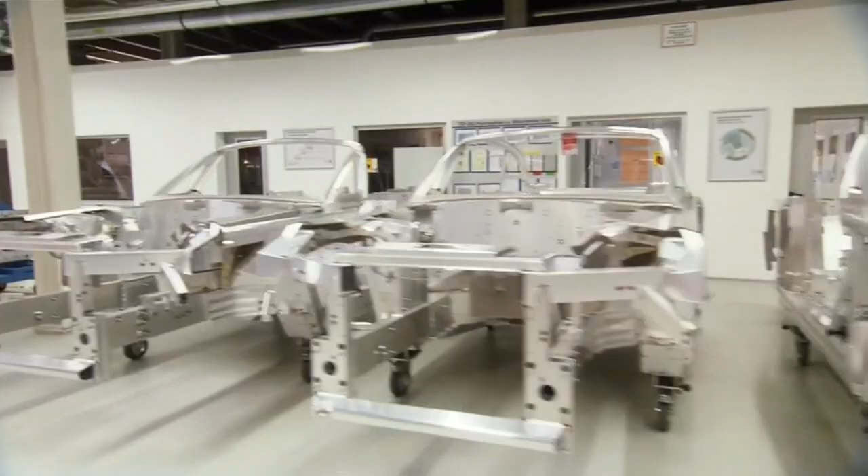You need the right skill and the right feeling.

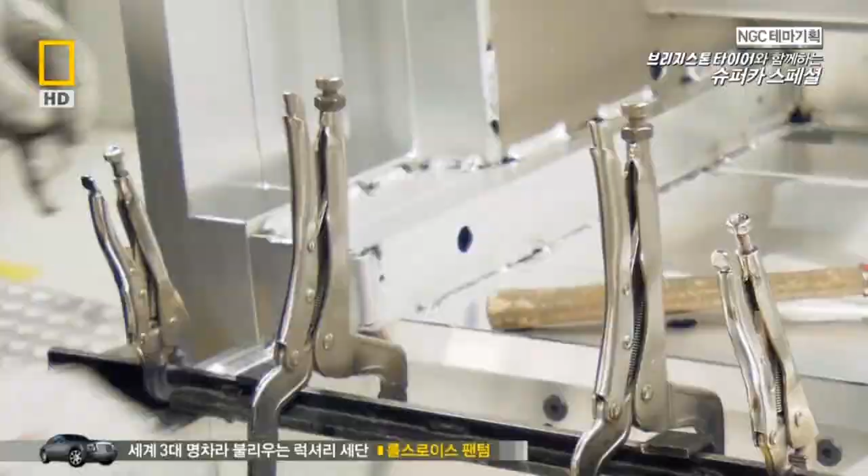It's complex because when you weld parts together, aluminum parts together, you always get distortion. It must be absolutely perfect. So it's important to have people who have feeling for the material.

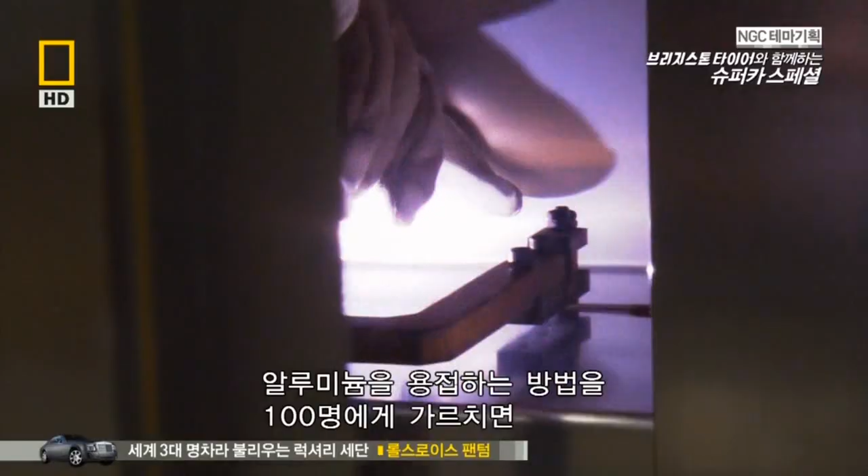For welding aluminium, you need the right skill and the right feeling. If you teach 100 people aluminium welding, 10 out of 100 will be able to manage that.

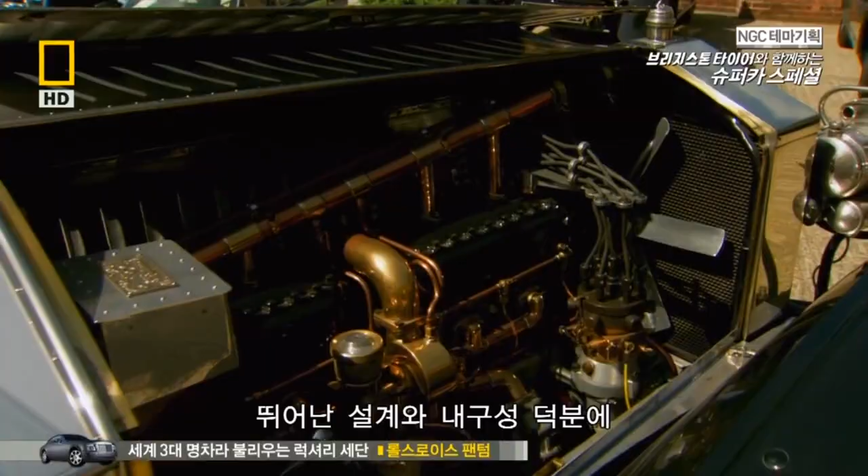The Silver Ghost was a totally outstanding car. It was very well designed and it was very durable, and this enabled it to do what it did. It was a marvellous thing. From 1907 to 1925, it really was the top luxury car in the world.

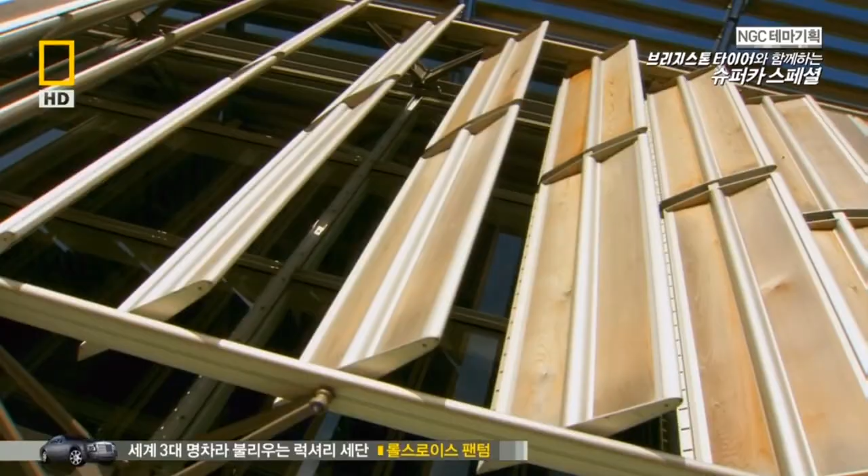I think it's a great destination, both for people who come and work here and also for customers who come to see their cars being built and take delivery of their cars here, or indeed come and order a car here.

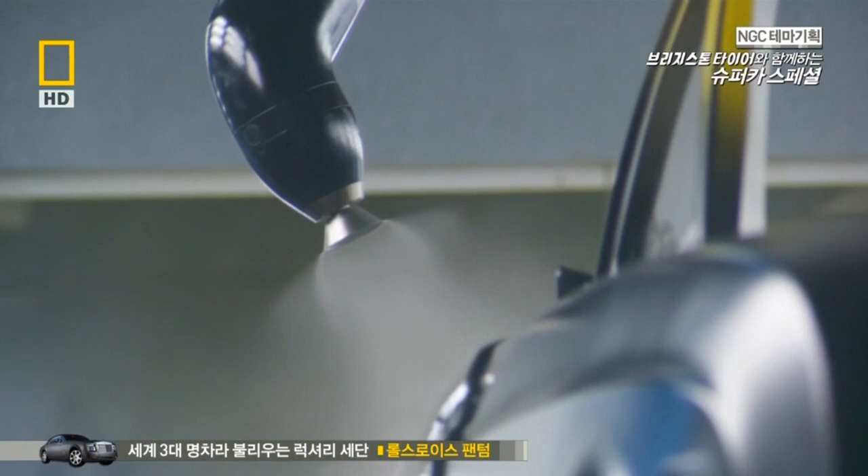The piano finish, it's pretty well close to a mirror in terms of smoothness. You can see your face in the final finish, it's that flat.

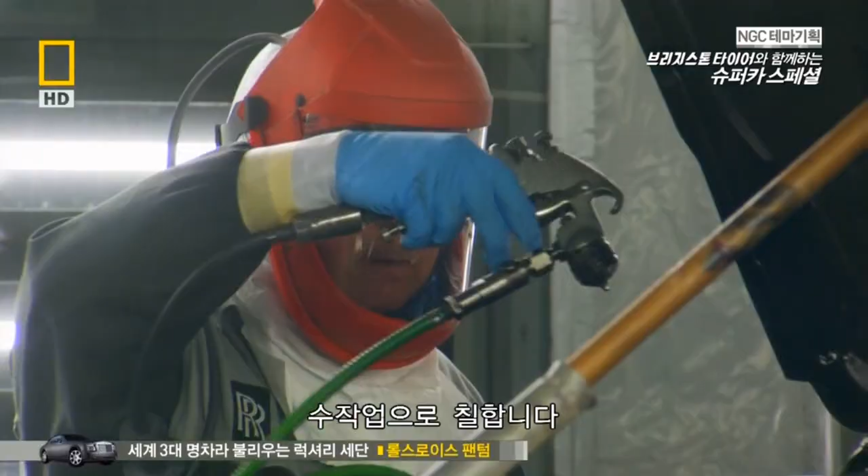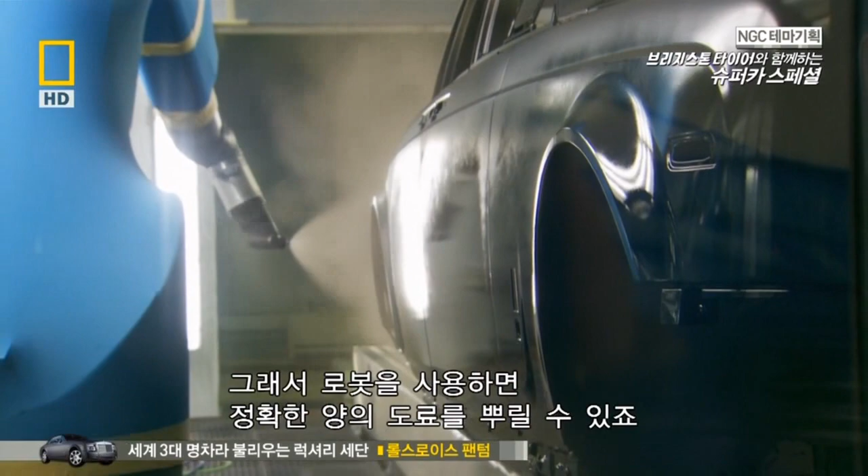Paint color can vary a little bit dependent on thickness. So by using the robots, we can therefore ensure exactly the right amount of paint is laid on the car. You'd have great difficulty achieving it by manual spray.

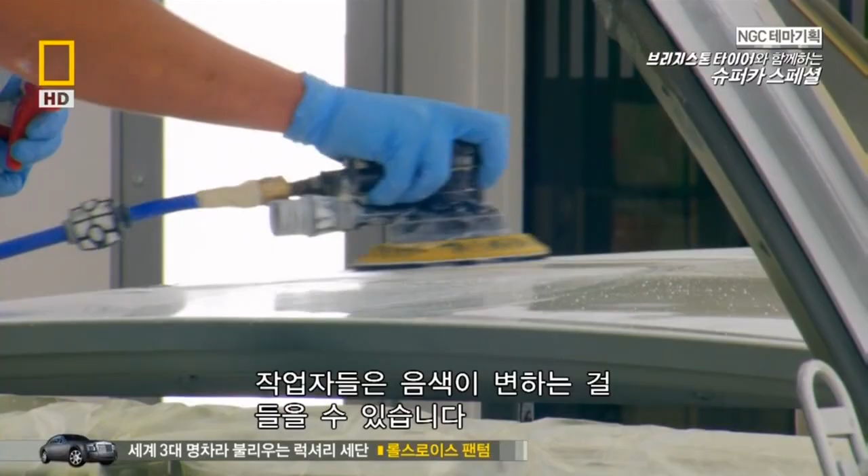As the paint surface has lost its wavy appearance and goes flat, the person working the car can actually hear a tone change. And that indicates to him he's gone to the point where he can stop the process. So it's a very difficult process and requires a lot of concentration and people's skills that you could never do with a robot.

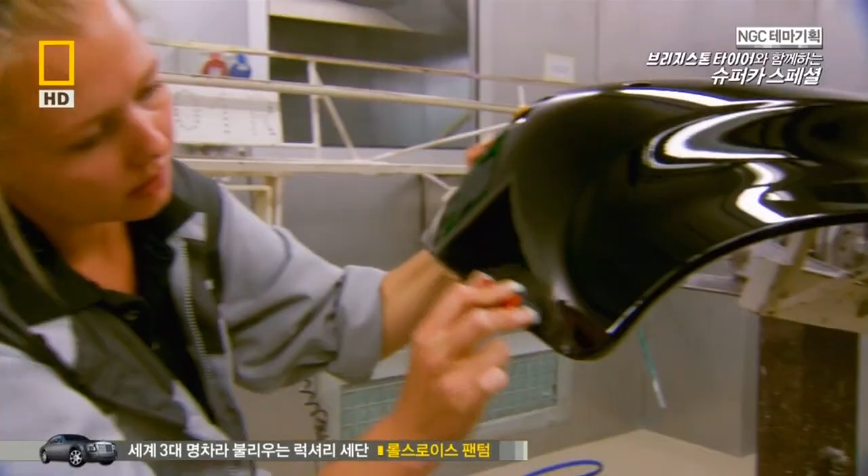We try our best not to get any. That's our goal. But what happens if we find a defect after the polishing? We've got a team that does the final bits on the car to make it perfect. The first thing a customer sees when he approaches the car is the paint finish. And if that's not good, it pretty well sets the tone for the rest of the car.

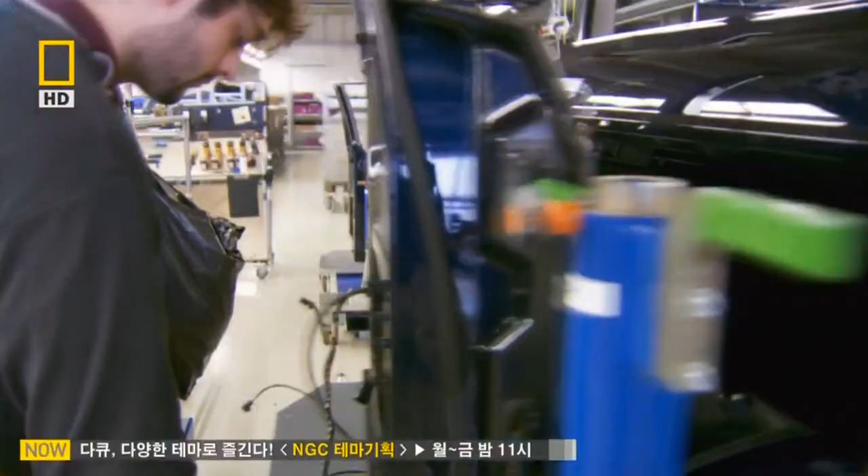Here at Rolls-Royce, obviously we have a unique situation where the car is hand-built, and the fact that we work with wood and leather, natural products, does make it sometimes quite difficult.

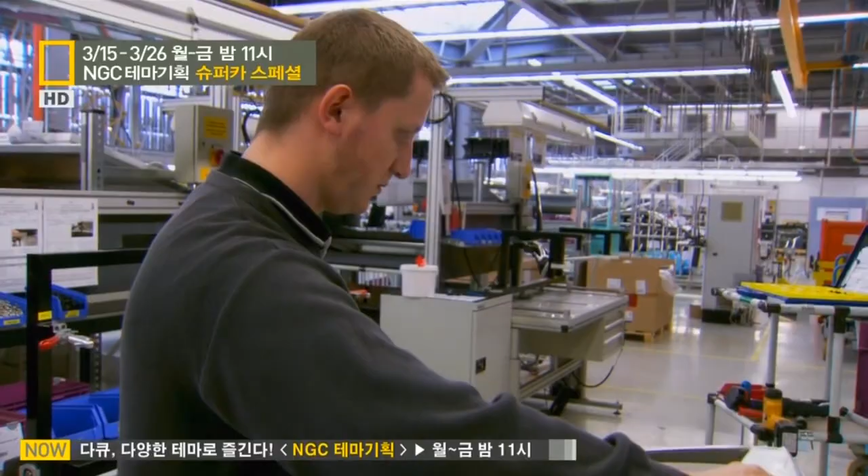Looking for any defects on the outer frame. If I found something, I've got to change the frame and start all over. With this one, there is some kind of dent on the edge here. I'm not sure about it, so I just need to get in touch with my zone leader and change this one.

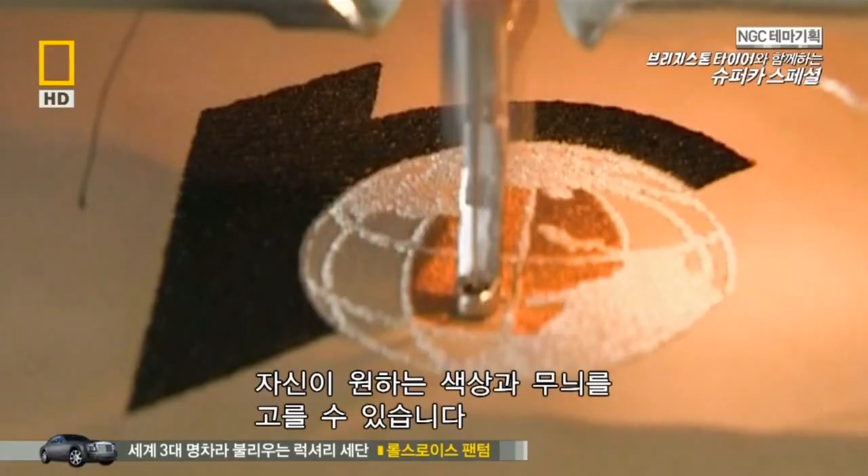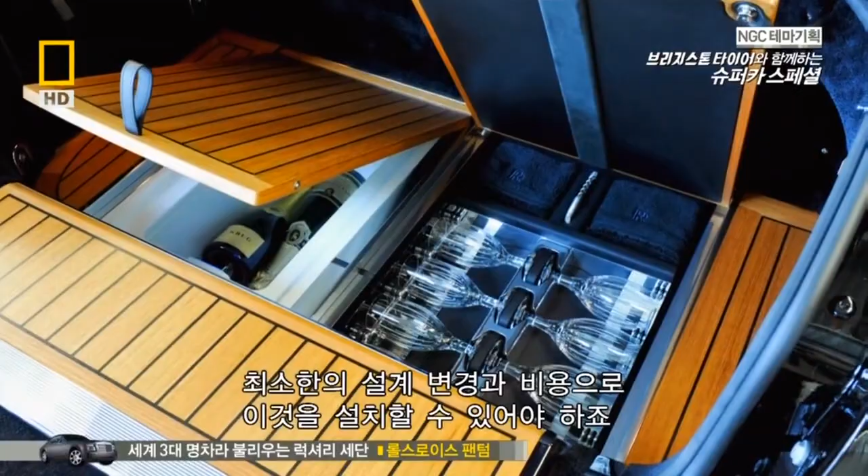We need to make sure that these will function in a true car environment. We're looking here, we can see a fridge unit, and within there we were able to package three standard bottles of champagne, and it's a package which we should be able to drop into the vehicle with minimal change and costs.

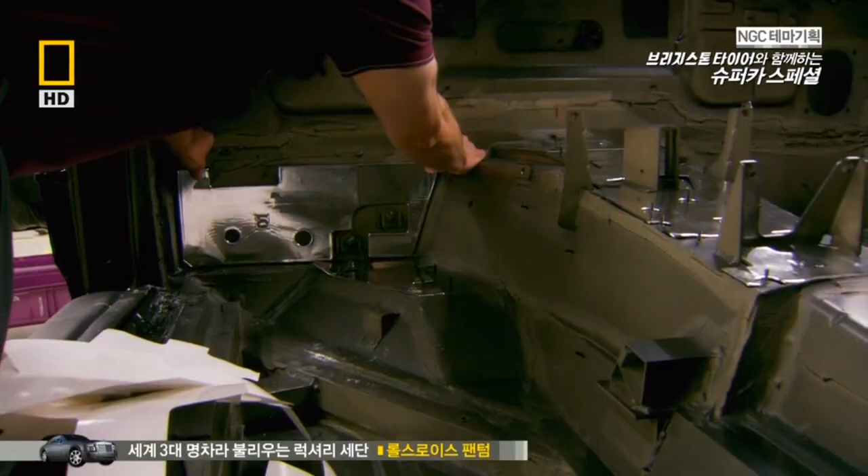Both of these components are applied to the body of the car before the wiring harness and before the carpet goes in. So obviously out of sight, out of mind, but it keeps the car nice and quiet for the occupant.

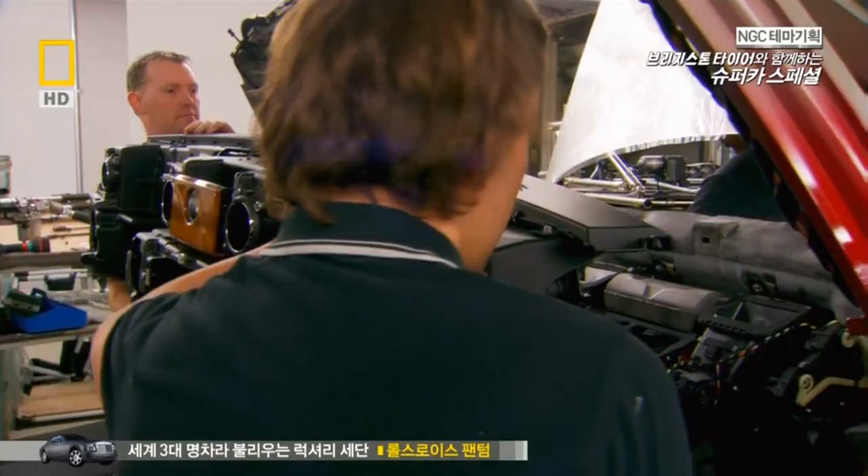Historically, with automotive manufacturing, this is normally where you would get squeaks and rattles because there's so many small components going together. This has been eliminated here at Rolls-Royce through the use of such a large alloy casting for the dashboard.

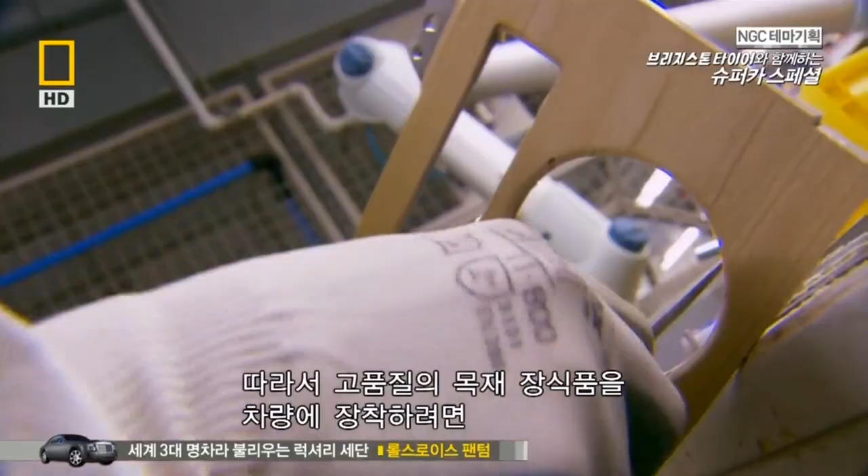Rolls-Royce is also about craftsmanship, and so inevitably there's a lot of man hours that go into making sure that we have a really high quality piece of furniture in the car.

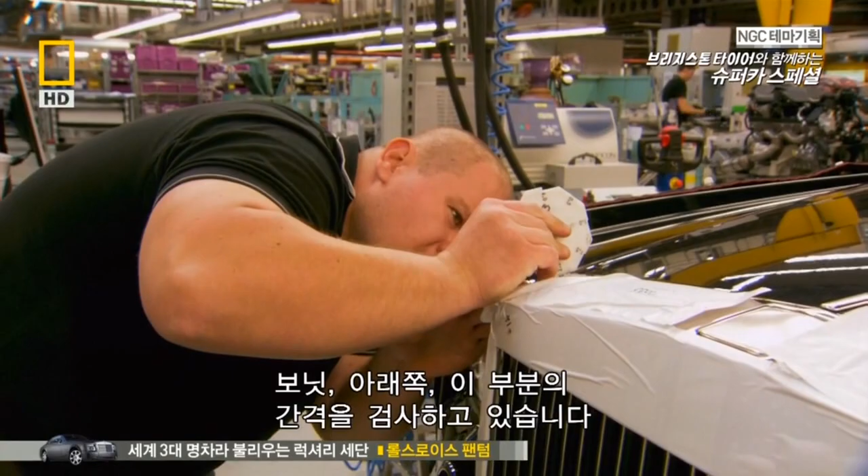I'm checking all the gaps, grille to the bonnet and bottom, and that gap here. On the top they have to be 4 mil. That is a very nice gap. Looks very smart. Everything looks very nice, so it's finished.

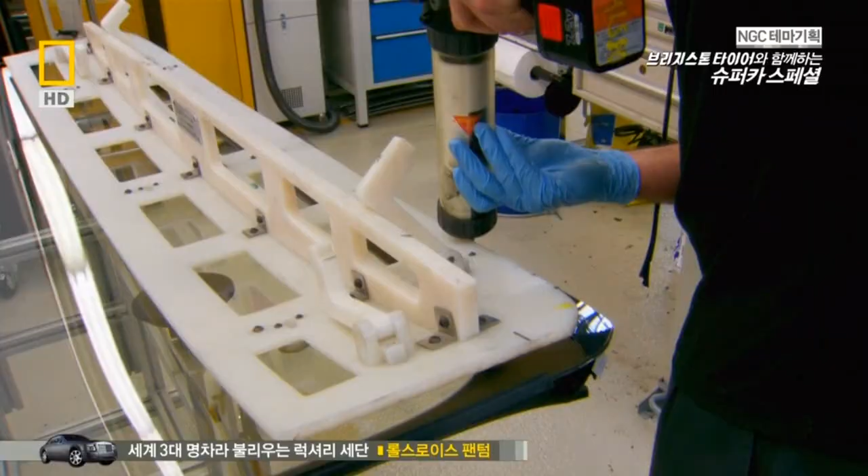Normally at a high volume plant it's automated and a robot cell would glaze front glass and rear glass in a matter of seconds.

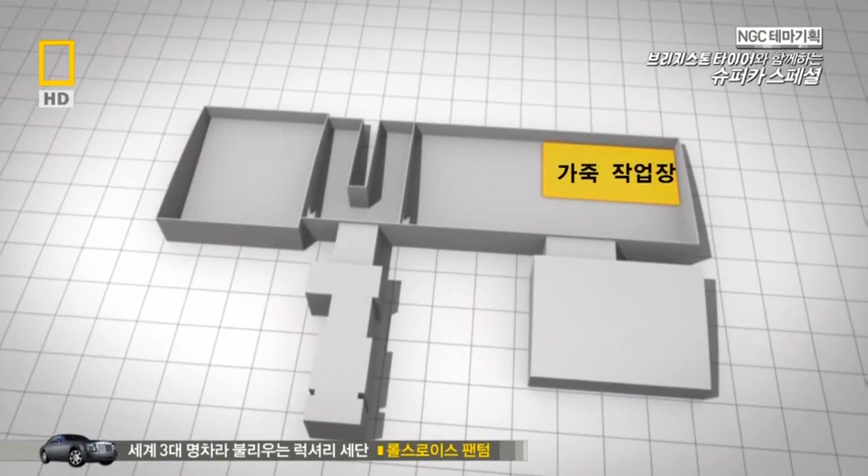Well, the thing about the Phantom is it's all about the quality that we put into the car, and the quality must start with the raw materials. If we don't have the right raw materials, then nothing else will follow.

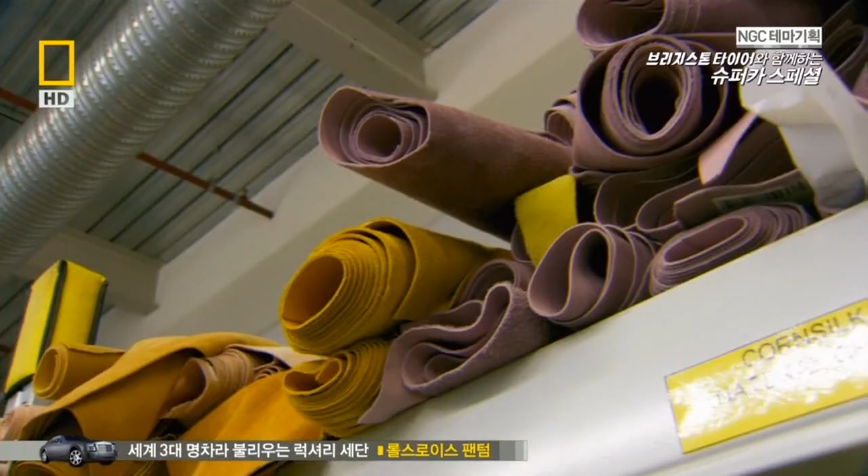What we see here is only a small subset of all of the colours that are available for the Rolls-Royce customer. There's so many colours on the palette, whether they're normal colours or bespoke colours, we can't have them all in-house at the same time. So we just have to have a subset of the colours that we need for that production.

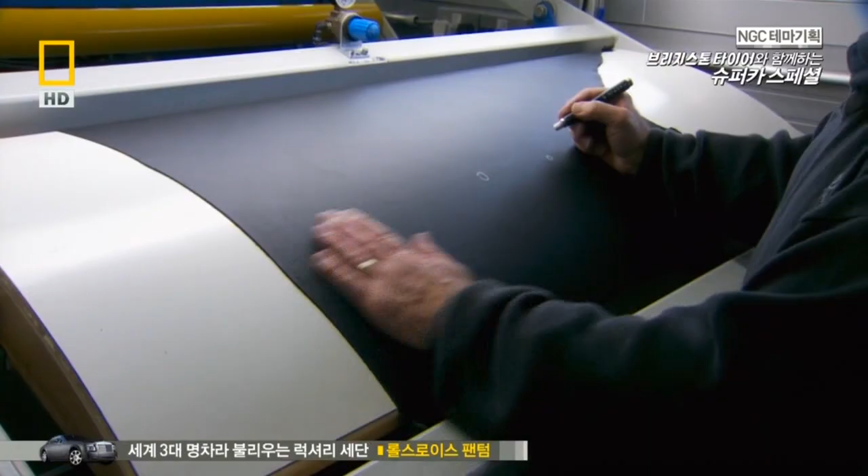We're looking for little bite marks, scars, just sort of as you rub your hand, feeling for little bits that are sticking up, which you can mark.

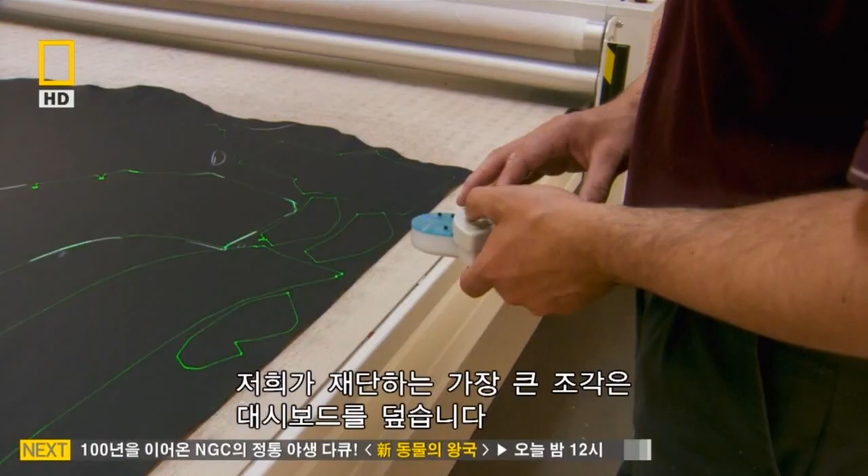One of the largest panels that we cut is across the instrument panel, so it's directly in the customer's eye line, and that part has to be absolutely perfect. So no scars, no mosquito bites, absolutely perfect piece of leather.

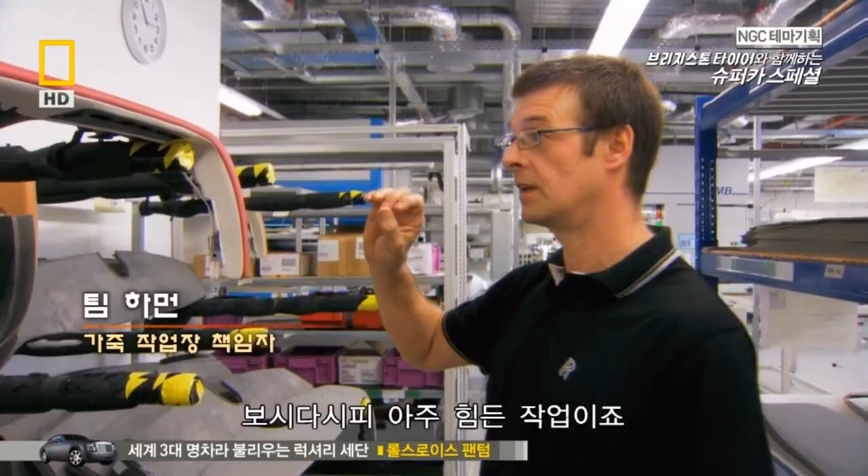Most important thing is the stitch line, so it looks exactly straight, which is extremely difficult. You can see the attention to detail to get that seam looking right by eye. It's never 100% perfect because it is handmade.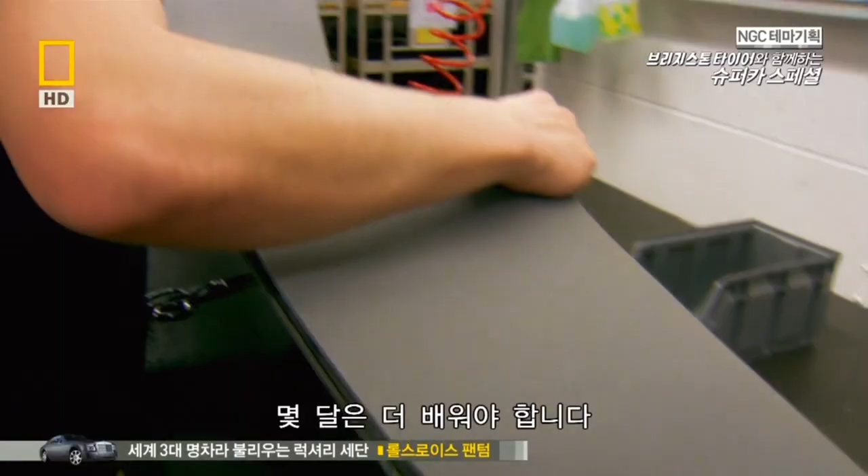And the dashboard that Paul is doing is one of the main features of the car from our trim point of view. It's obviously the focal point. It still takes a few months learning to get the quality correct for Rolls-Royce standard. So this is a real top job that Paul's doing here.

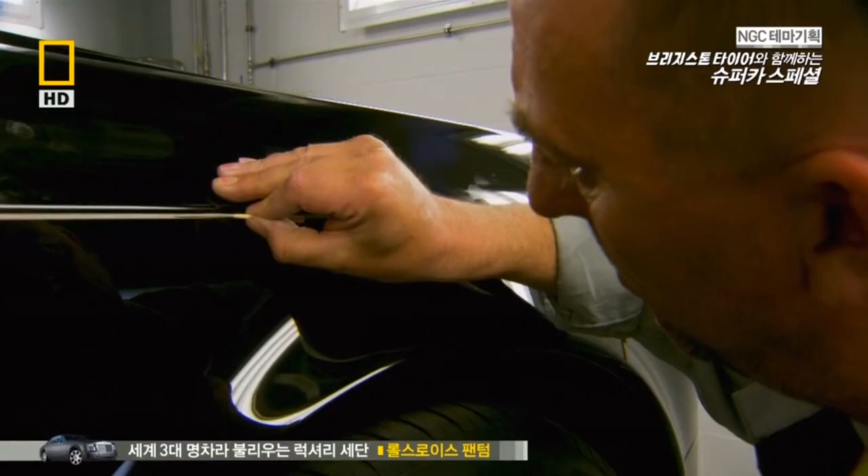And I am the only one that can do this. There is no one else here that can do this. It was just a case of developing a technique to do a car.

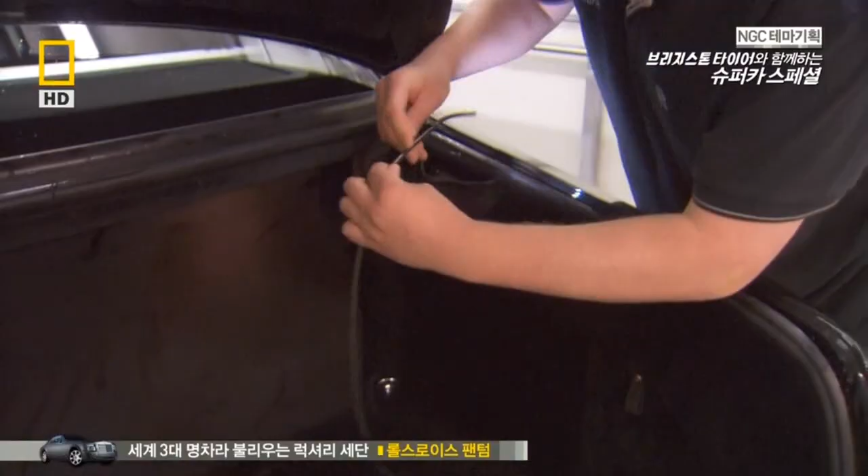The car looks good on this side so far.